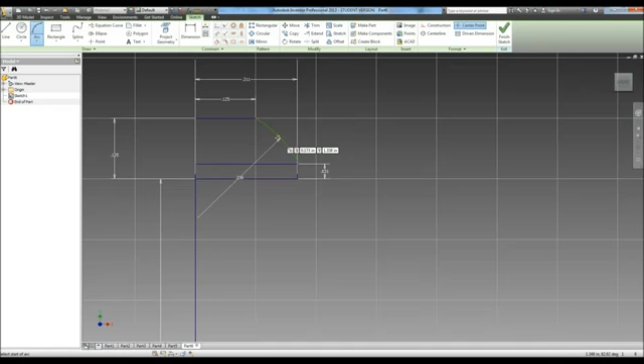We're going to do an arc here to here, and it tells us the radius is 0.236. Didn't connect there. Let's try it again. 0.236. Okay, now we need to go to the bottom.

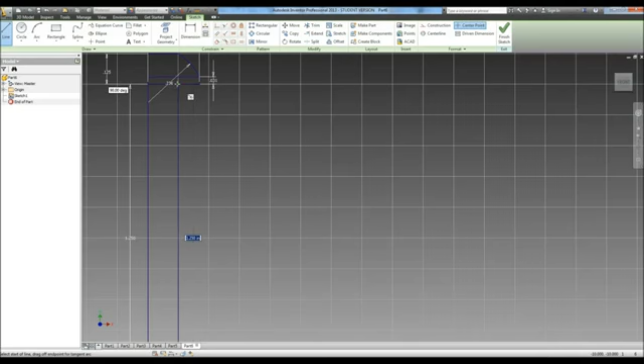Our diameter for our bolt is 0.25, so we're going to put in the radius, which is 0.125, and we're going to draw straight up, connect right there. Now we need to do our chamfer down at the bottom.

It tells us our chamfer is 45 degrees, so we're going to select the third option on our chamfer. It's 45 degrees with a distance of 0.03. And we're only going to chamfer the one side. We're going to chamfer this. And we're not going to chamfer the whole thing because that would mess it up when we revolve it. Okay, hit OK there. Hit finish.

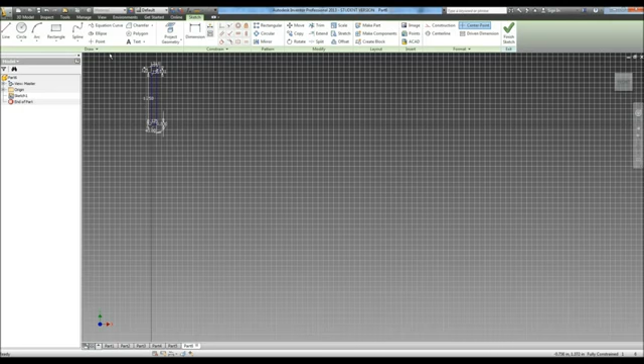Hit your home key to zoom in. Now we're going to do revolve, and we have to make sure to select all of our sketches. Now if, like this one, it's not letting me select right there, what you can do is hit cancel, double click on your sketch again, and then go in here and start deleting some of these dimensions.

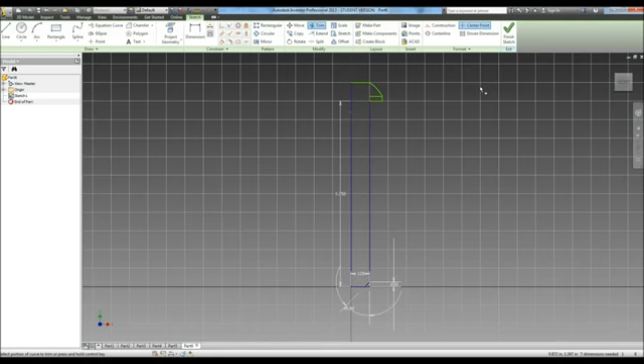Okay, so we'll get rid of that. Alright, and there we can see why possibly we were not allowed to connect, because that line wasn't drawn in. And then we can trim this also, and that will leave us the ability to revolve.

Okay. Now we're going to do a sketch on the top here, and we need to do a polygon. I'm going to draw that in, and now it tells us to dimension this. It's 5/32 across the flats, so 5 divided by 32. And we're going to hit finish.

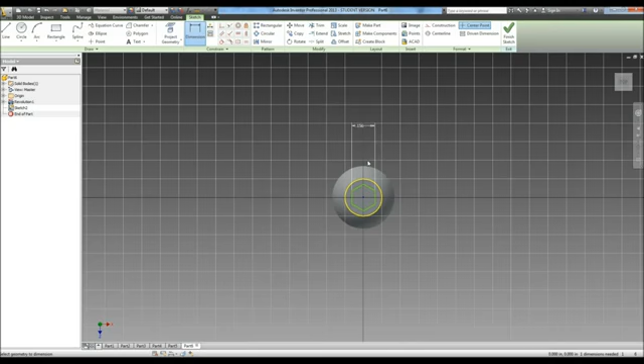We're going to extrude. Change the direction. We're going to cut into it a depth of 0.111. Hit OK. Now we need to thread it. Select our threads. Length 1 inch.

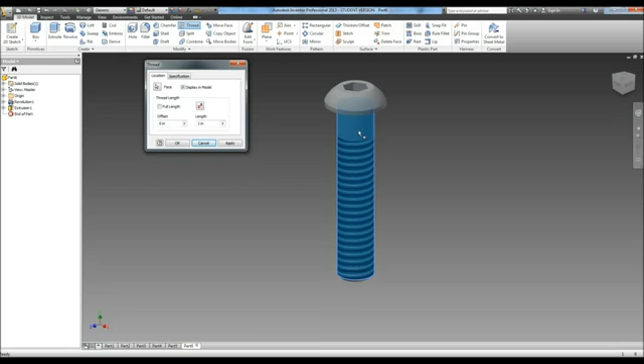Alright, we're leaving the offset at 0, even though it tells us it's a 1/4 inch offset, because we know that is now a 1/4 inch difference right there. Hit apply. Exit. And there is your bolt, your axle peg. Save that, and you're ready to go to the next one.